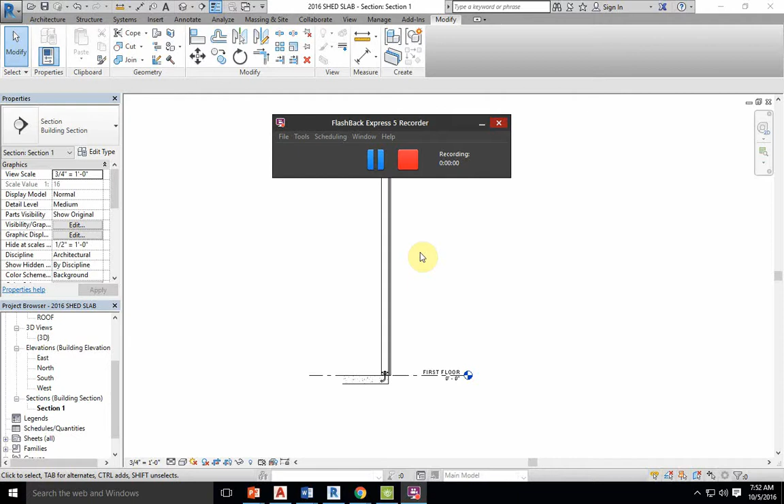Okay, this is the second video on how to make your wall section for your shed project for CEA. When we left off, we had created our roof trusses, thrown in our bottom and top plate, and left off with our anchor bolt.

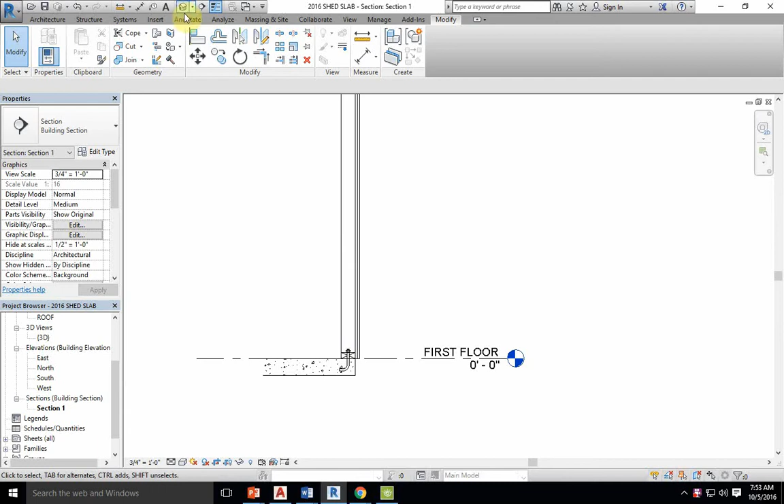Now we're going to start labeling everything on our section view. To do that, go to the Annotate tab and come to the Text tool. Make sure the one with the curved leader is selected. Then change the font to 3/32 inches, I believe. Let's see how big that is.

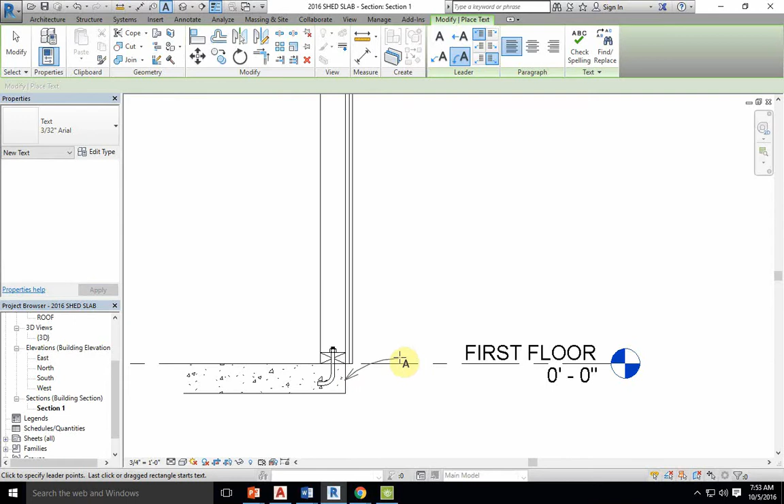We're going to start pointing at each item, coming up slightly above the first floor and labeling what everything is. Refer to your handout for all the labels, but this is the 4-inch reinforced concrete, always in all caps. Just click the screen off, and there's your label.

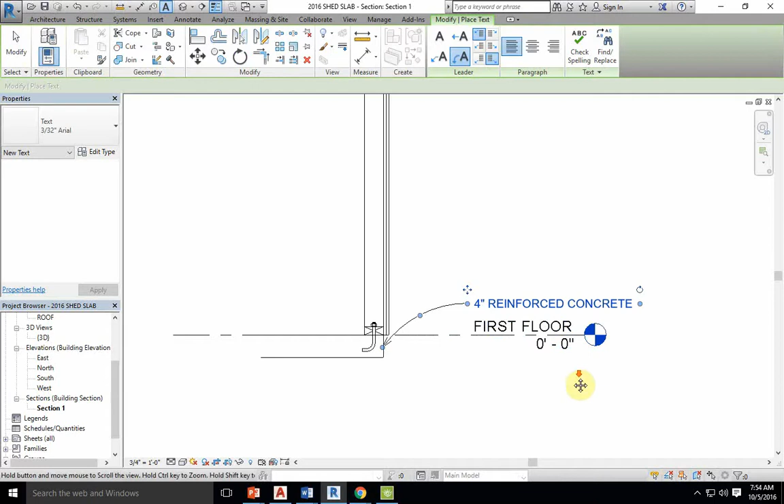Now I'll label a couple with you, and you can label the rest on your own. When we label our next item, our anchor bolt, watch how I come off. You have to make sure you line them up. See how I get this line right here? All your arrow ends must line up.

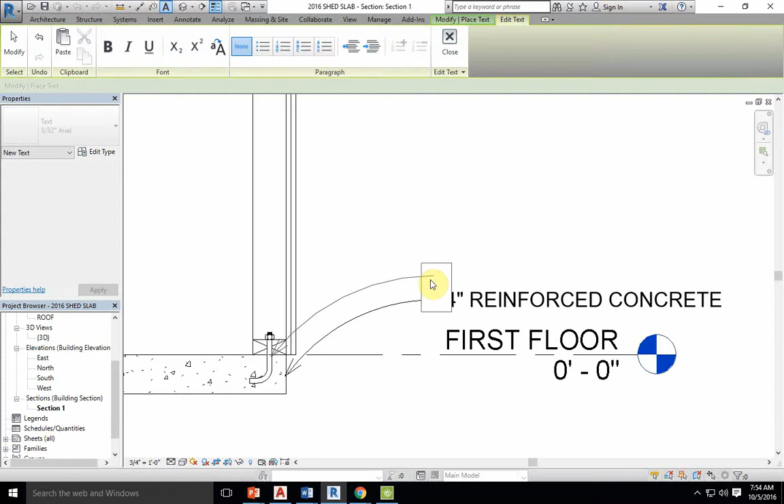That is a grading criteria on your rubric. See how it also snaps in a line above it? It's going to space it out for you. And I just click, and now I could do 1/2 inch anchor bolt. Click the screen. Alright, and we just keep on going.

Or we say 2x4 sole plate. Alright, you're just going to go and label all the layers. I'm not going to sit here and label them all for you. You could refer to your sheet, but that's how you're going to label them.

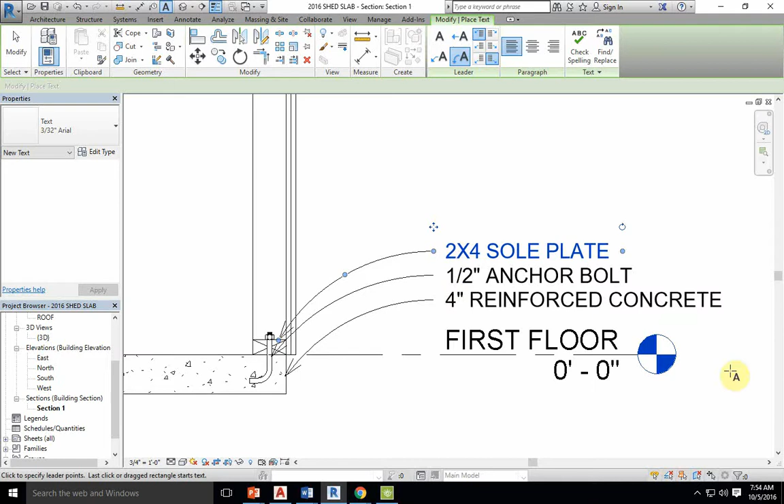The big thing though is they have to line up on the left-hand side, and they have to line up with their spacing. Now when I come up to the top, I start labeling the things up here, like my double top plate and my fascia board. Watch how I do this. Alright, I'm going to zoom in.

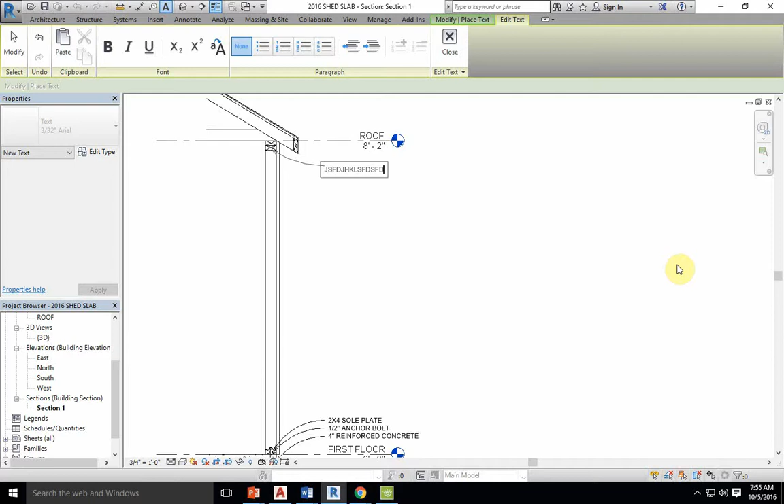I'm going to click on my double top plate. I have to be able to see that one from down there so I could get that line up, so it's nice and clean. All my arrows line up, and I click, and I could type in whatever it is. Then like I said, you could finish up labeling all the stuff at the top, and there's more things along the side to label. But I'd like you to refer to your sheet.

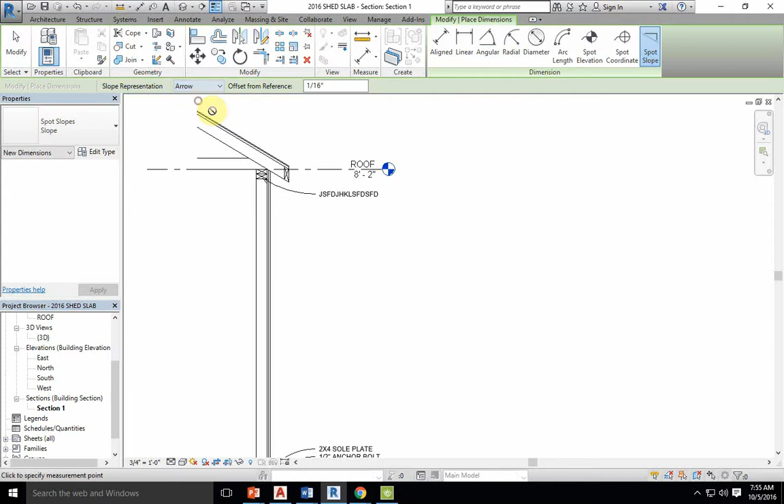The last thing I need to do, let's hit escape, is we need to get the slope of the roof labeled. So let's go to spot slope. You want to make sure it's set to triangle. If it's set to arrow, it's going to look like this, which we don't want. We want to change it to triangle.

Alright, we're clicking our roof. You double click it because you have to click the roof you want to attach it to, and the side - and of course the arrow will toggle that back and forth. Now, I don't like this one because I like to have it over 12 inches. So let's click on it, edit type.

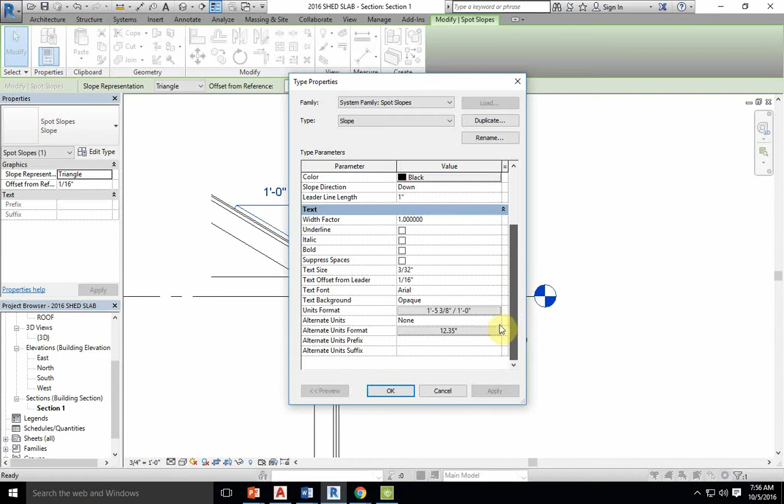Okay, let's go down and find where we have our 12 inches, and it's right here. We'll change it to over 12. Okay, that looks better. And then if we zoom out, if it's a little too big, I can always click on it and shrink it down, okay? So that's how we would label our roof slope.

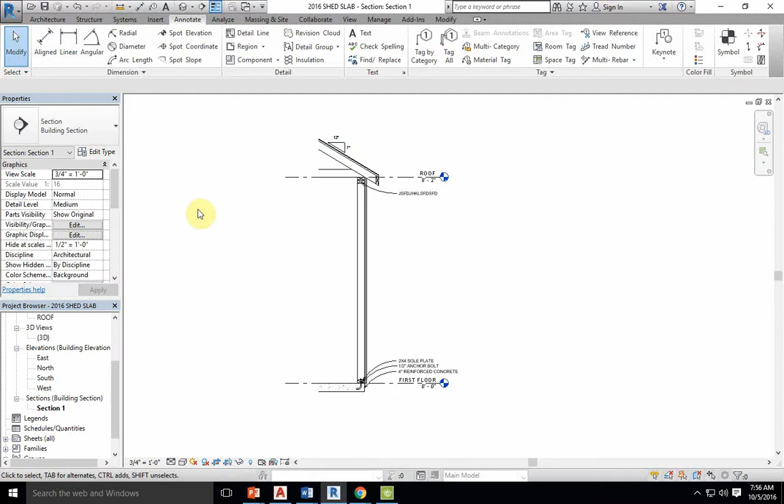When you're ready to print this, imagine mine is completely labeled with everything on your sheet, and it's all spaced appropriately and lined up. I would come down here to that sheet I created yesterday. I'm going to take my section view and drag and drop it in, and you can see it's not fitting. So let's delete that. Let's go back.

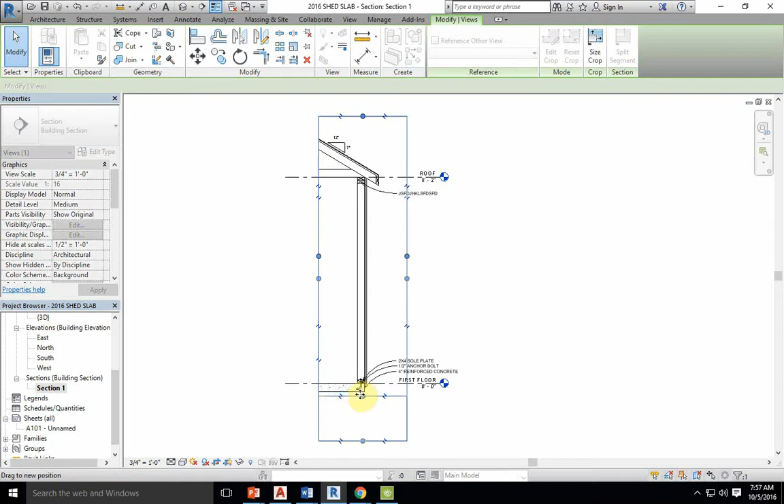Let's turn on our crop region. Oh geez, look at all that I got up there. Let's pull it down and up. That looks better. So now if I take and drag and drop, oh yeah, fits nice and perfect, and I want to have it centered on there. Make sure I have my crop region turned off.

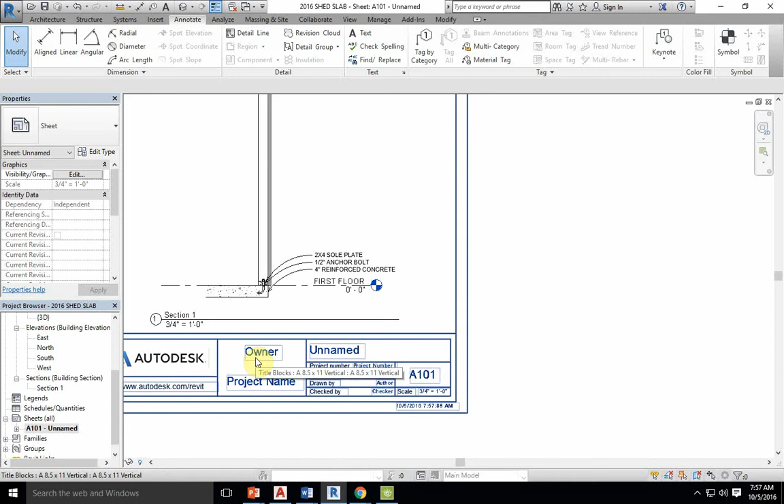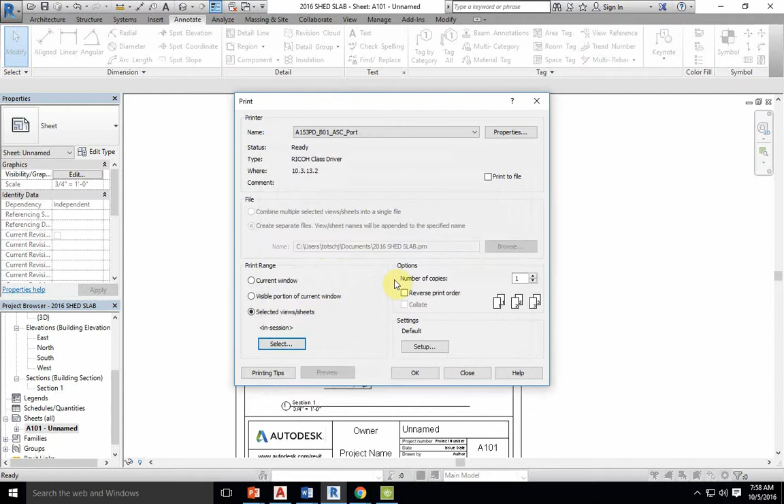Once we have it completed, we're just going to hit print. Okay, we're going to go to the A153 printer. We're going to go to selected sheets. We're going to select that A101 sheet, hit OK. No, we don't need to save that for future reference. And then the big thing you have to do when you do your setup is you have to change it to portrait right here.

Okay, because if you do landscape, it's going to make it incorrect. And then that would do what you need to do, and you hit OK. And that concludes this video.